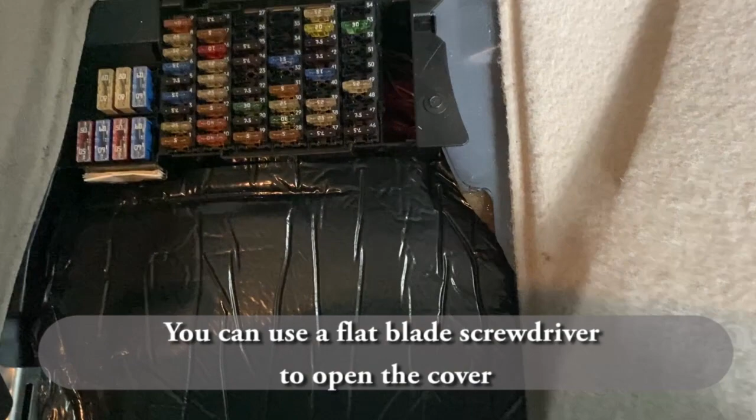You can use a flat blade screwdriver to unlock the cover. Then lift it up and take it out. Now you can see the fuse panel from inside the car.

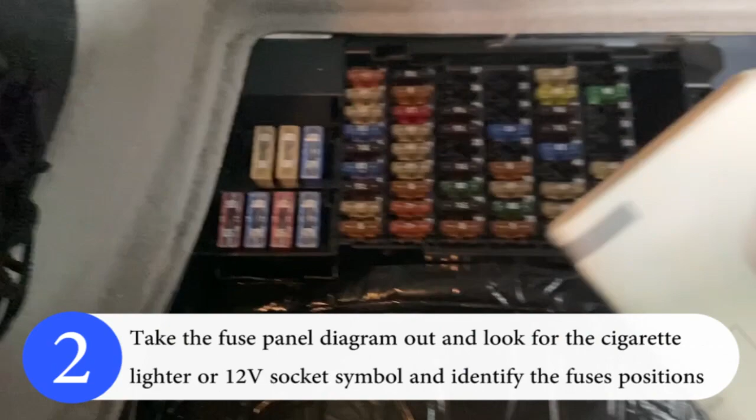Now you can take the fuse panel diagram out and look for the cigarette lighter or 12 volt socket symbol and identify the fuse's positions.

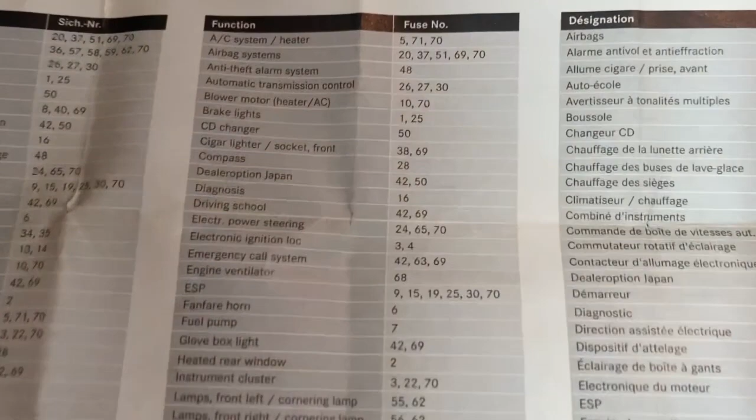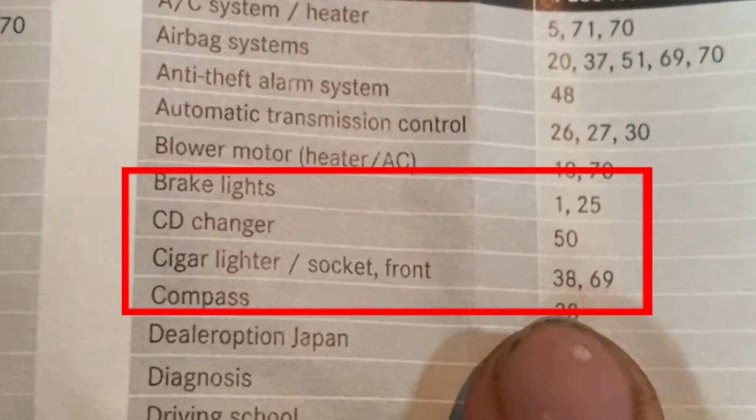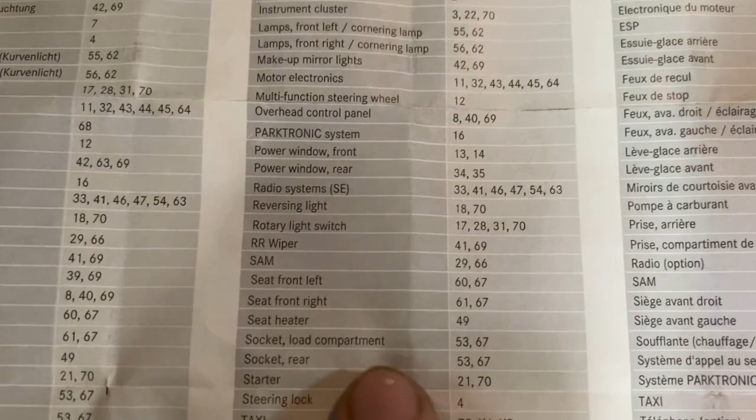So if we look carefully, the cigarette lighter socket front is on positions 38 and 69. We will look for the socket from the rear. So the socket in the load compartment and the rear socket are on positions 53 and 67.

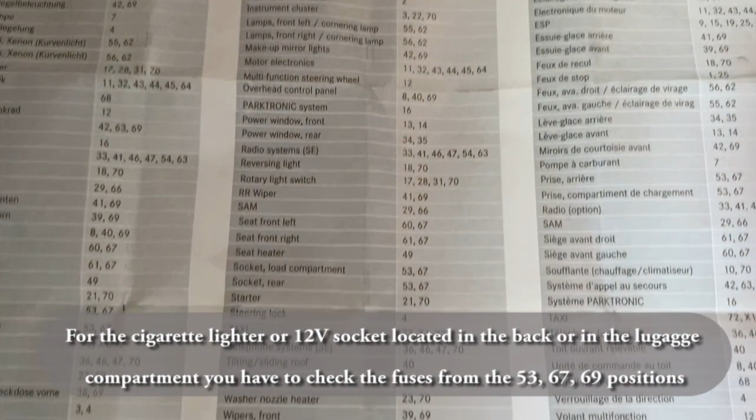So for the cigarette lighter or 12 volt socket located in the back or in the luggage compartment, you have to check the fuses from positions 53, 67 and 69.

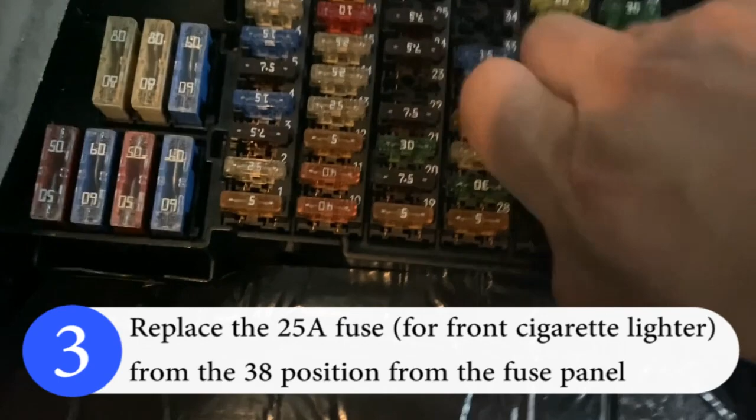So this is from position 38, and we'll replace the 25 ampere fuse for the front cigarette lighter from position 38 of the fuse panel. We will remove it using a flathead screwdriver, or bare hands, or fingers.

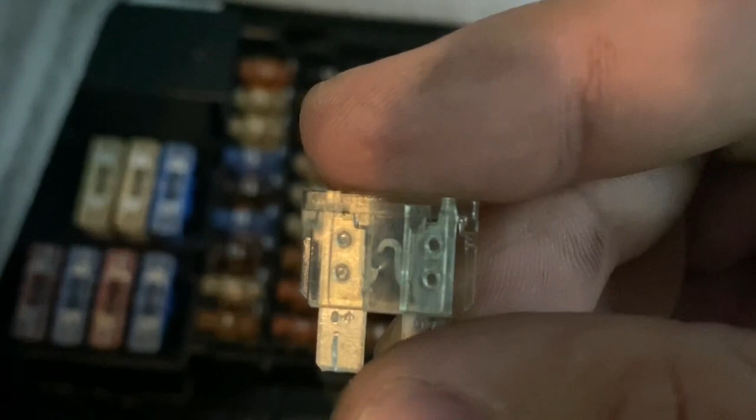So if you can see, the fuse is burned.

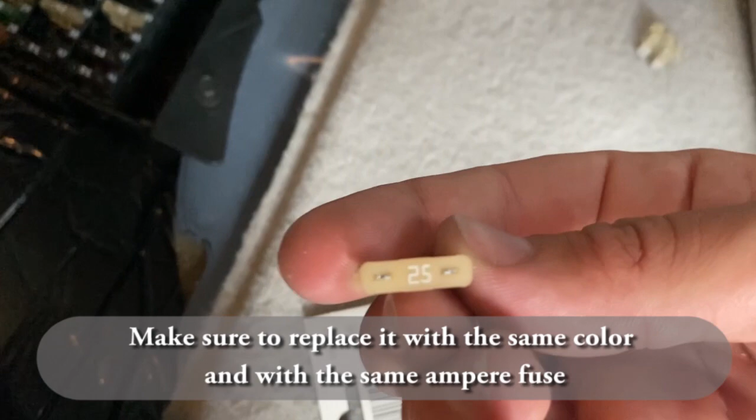So we will replace it with a new one. Make sure to replace it with the same color and the same ampere fuse. In this case it's 25 ampere.

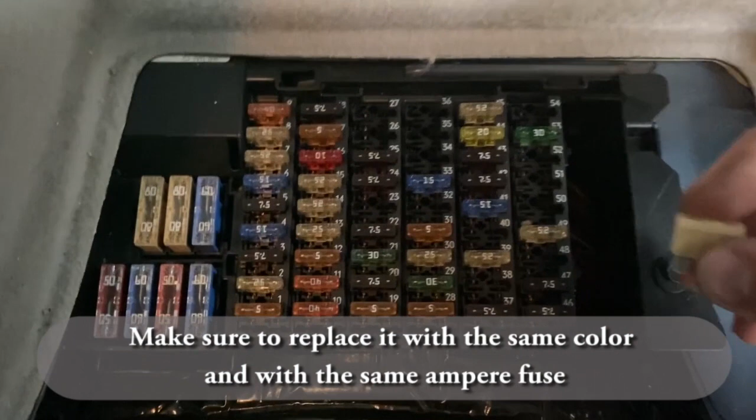So for the cigarette lighter or 12 volt socket located in the back or in the luggage compartment, you have to check the fuses from positions 53, 67 and 69. So check all of them to see if any other is burned.

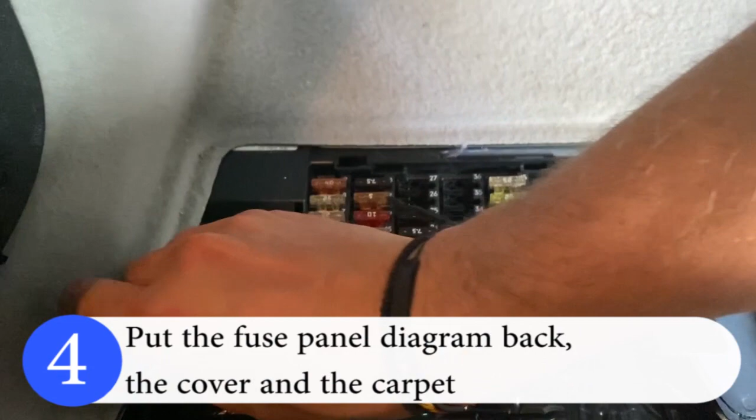Then after that, put the fuse panel diagram back, the cover, and the carpet also. And put the cover back.

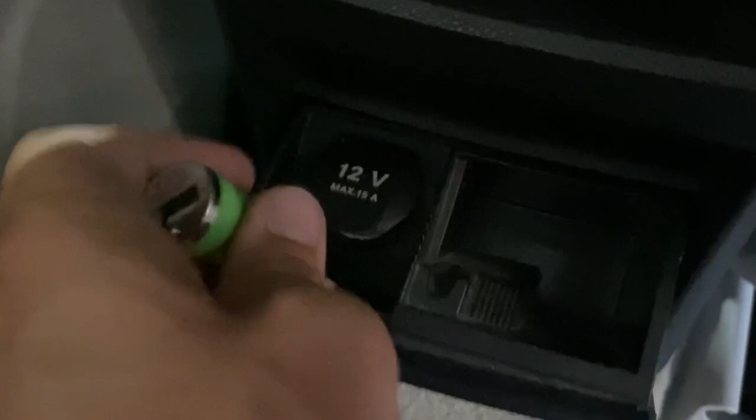Now we can try to see if the rear socket is working. So now the LED is on, so it's working.